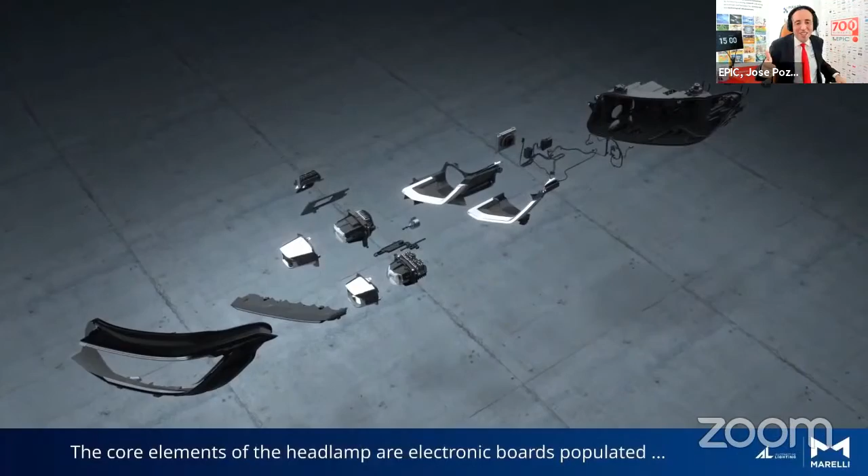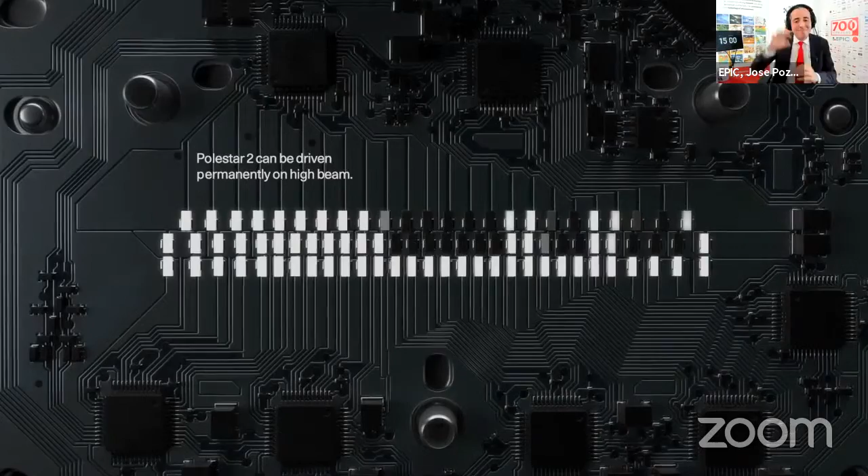However, during our previous meeting on automotive lighting, Volvo shared their unmet needs in terms of power, field of view, and their vision on having both a low and high beam, maximizing the illumination of the road. And this adds to the upcoming demand for better interior lighting in automotive. So we are bringing back Volvo and its supply chain to discuss how molded optics need to adapt to their new challenges. We certainly can't have a successful meeting on molded optics without Leica in the room.

They've spent 107 years developing camera solutions that capture the memories of 5 generations. I want to engage with them about the need for high-resolution features in the optics, which implies high-resolution features in the mold itself. What new materials are needed and what new manufacturing techniques for the molds, such as direct laser writing, nanometer scale 3D printing, or the development of flexible molds. Let's wait for their answer to our famous EPIC question.

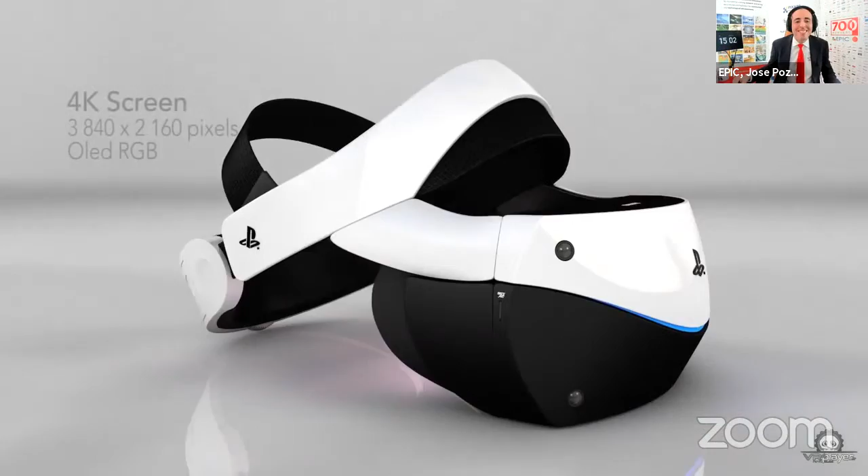The 2-hour discussion will also examine room for cooperation with the manufacturers of the PlayStation 5, Sony DADC. The entertainment world is in a constant flux. The need for novel optics in augmented reality, as well as high-quality streaming to the gamers themselves, has opened up new challenges for the optics manufacturers. These are just 3 examples.

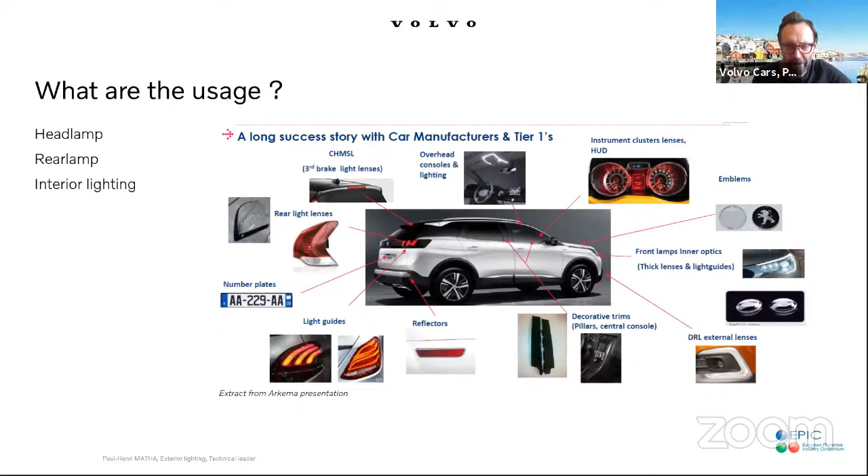So I hope you see my screen. Very clear. Yeah, so I have done some small slides, just to introduce the topic of automotive lighting and to show you the stakes. I think it is a slide I already presented in one EPIC meeting, but it is the usage of optical parts in exterior lighting. So we have headlamps in the front, rear lamps in the rear, and we have also interior lighting. So a lot of components with a lot of optical systems and different technologies.

So what are the stakes for us? It is for signaling functions. You see, for example, on this picture, the DRL function, the daytime running light, what we call in Volvo the Thor's hammer, which is the Volvo signature. And also we use it for lighting functions. For lighting functions, I have seen your video from Polestar. So it is, for example, the Polestar 2, where you see the headlamp.

And when you see what we have inside, indeed, we have the LEDs with the PCBs, but we have also an optical system with the silicone part component. We have also the lens, which is in plastic, and we have a lot of other components. All these things are part of the optical system.

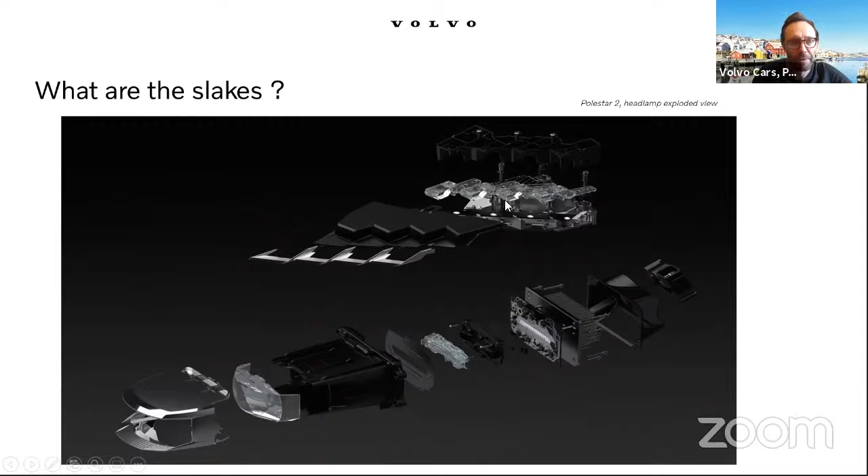When we develop some optical component, especially for signaling function, we have some technology like reflector, light guide, inner lens, Fresnel concept and so on. Each time we combine a different optical system between the LED, which is the input, and the output, with light guide combined with reflector and so on. All the signaling functions are done like this for automotive lighting signaling function.

What is the main stake for car makers today? With electrification, it is especially the power consumption. On this slide, on the left, you have what we have for daytime running light with bulbs: around 50 watts per car. If you design a very efficient optical system, with optical efficiency around 50%, you will have between 10 and 20 watts. So this is very efficient. We have no topic for this.

But when you want to design something very nice, like the Volvo signatures, the power consumption can be between 30 to 60 watts per car, and the optical efficiency will be very, very low. Sometimes we will have a power consumption which is more powerful than a bulb function.

We have exactly the same topic with low beam power consumption. By night, with bulbs in the past, it was around 140 watts per car. With an efficient LED system, quite big, what we see for example on this Renault Captur, the power efficiency is also quite good, and the power consumption is quite low, around 20 to 40 watts per car.

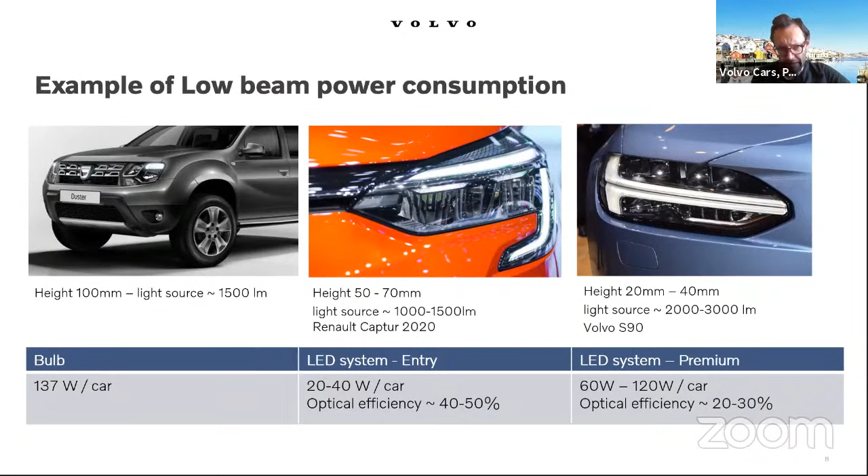But when you want to go to a very efficient system with a very thin headlamp, like what you can see on the Volvo S90, then the power efficiency is less good, and at the end it can be at the same level as a halogen bulb. This is today what is very, very important for car makers.

Just to give some figures: when we speak about power consumption, 50 watts is equivalent to 1 gram CO2 when we speak about internal combustion engine, what we had in the past with gasoline and diesel engines. This is the value during WLTP homologation in Europe. When we speak about electrical cars, battery electrical cars, BEV, it is around 1% of the range. It depends on the size of the battery, but 1% of the range is a good value for 50 watts.

To work on that, we have to look at the lumen output per watt, so the lumen per watt or candela output per watt. What we have seen previously is that for lighting function we are between 20 and 50%, and for signaling we have around 10%. So this is not good, or it could be improved.

What we need is, if we want to reduce the power consumption, to reduce the size of the battery or increase the range of the car, we have to develop more efficient solutions, less watt for the same amount of lumen. The idea is to be able to multiply by 2 the efficiency of the system.

On the right, I put what are the actions and what we are waiting for from EPIC members: to work on the light source, the optical system, the plastic raw material, the injection tool, the tool design, the optical concept itself, or all the other things we can develop. This was my last slide, just an introduction to show what we need if we want to improve optical efficiency for automotive lighting. Thank you.

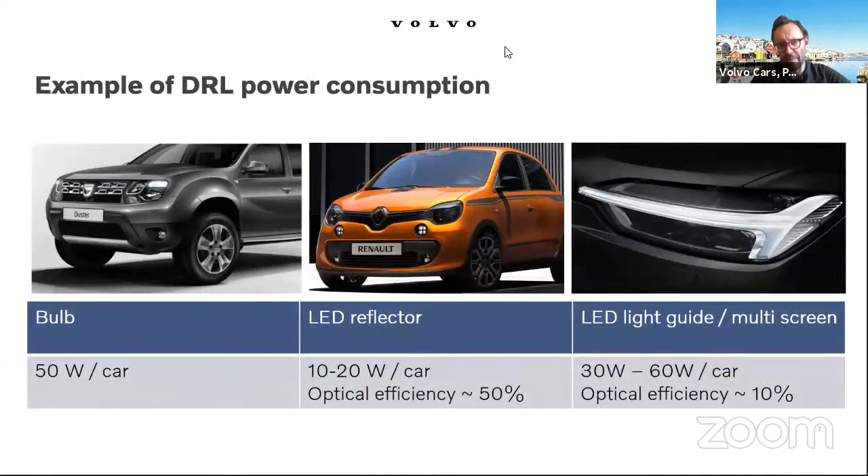When it comes to optical design, what do you mean by optical design? I've just mentioned some designs. For example, with a reflector solution, with inner lens, with light guide, it is not very efficient, so perhaps we have to create new designs. We have seen some MLA, micro lens array concepts, we have diffractive optics, we have new designs, but for the moment it is only research. We have not seen it in pre-development or in development. So I think it's something that could be very good, but we have to move forward and be able to do the industrialization and development of this technology.

Thank you so much. Let me see if we have any comments from the room.

Please unmute. There are many comments in the room which I'm going to voice out because people are telling me in private. The first comment is that everybody sees a huge push for plastic. Is there anything going on with glass-based optics? I know it's used heavily for interior, but for exterior lighting, is there any activity on that?

Is there any challenge that we cover with glass? Yes, glass is good, but after that we have the problem with weight. So yes, glass is good, no issue for that. We worked, for example, in the past with Holophane in France, a good supplier. We have Docter Optics, so we have a lot of suppliers with glass. It's not a problem, if we have some good properties with glass, we can use it. I understood that we have limitations with the shape, so especially for the designers, glass is always a question and it could always be a problem.

You know what the problem is here? From all these meetings I realize that end users come here with a challenge, and the challenge is always: cost is a challenge, weight is a challenge, materials are a challenge. How do I make these optics come true? And then we have the suppliers who tell you my optics are the best, my material is the best, my molds are the best, my nano imprint lithography is the best.

Just for recapitulation, I want to show you how glass molding works. We have dedicated glass preforms, which we put into very precisely manufactured molds. We heat everything up together, and then we have pistons that move toward each other, causing deformation of the glass preforms and leading them into their final shape.

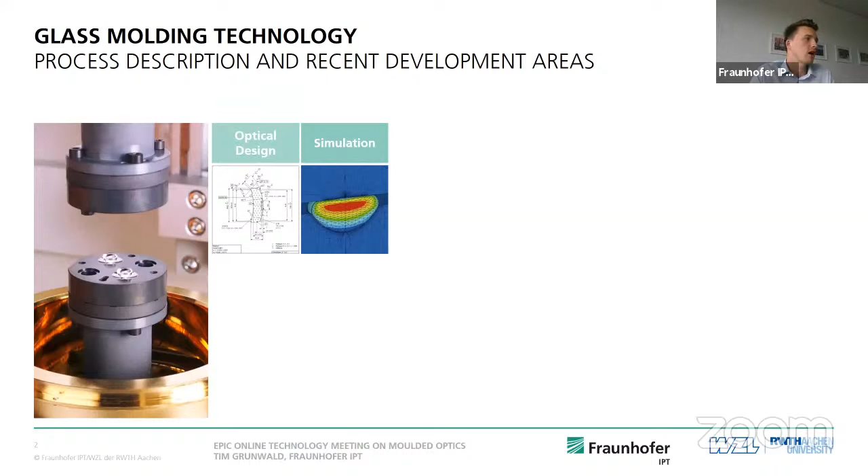What we usually do every day in our department is start from an optical design. Based on that, we make a first simulation to see how it will look, what the cost will be, and if it's feasible. The main point the simulation tells us is how the tools should look. The tools are later manufactured in-house by means of ultra-precision grinding, for example. Subsequently they are coated, and afterward the molding takes place.

One aspect covering the whole process chain is actually metrology. In the end, we have a ready-to-coat optic or a ready-to-use optic. So this is what we do every day.

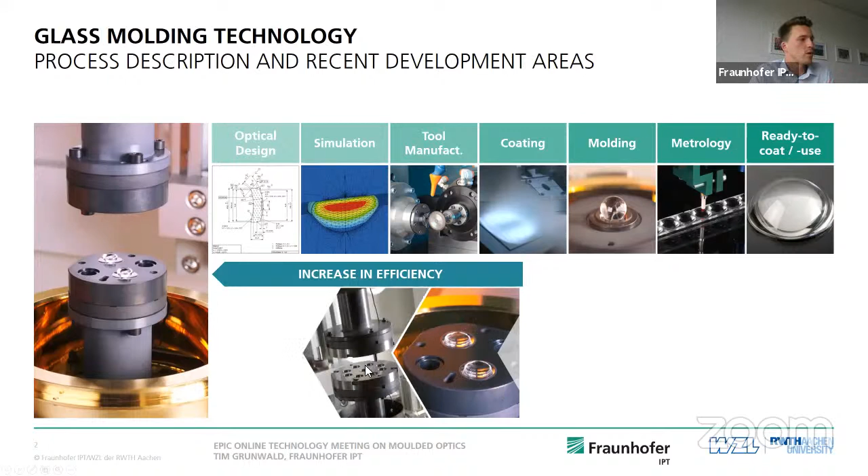But of course we also face challenges, mostly coming from industry. The first is that we want to increase efficiency. Glass will always be more expensive than polymer, but we try to make glass cheaper and cheaper. That means we can do more glass optics in one shot, or even multi-cavity molding — here you can see, I think, nine cavities.

We can also step to wafer-level glass molding, where we just put a glass wafer into the molds and manufacture hundreds of lenses in one shot.

But this is not what I'm going to talk about today. I want to talk about another challenge, called the increase in precision. For some impressions, here you can see some spheres, some freeforms, and some micro-optics.

We are already within fractions of a micrometer if you take a closer look at the peak-to-valley error, and the roughnesses are in the single-digit nanometer range. But we think glass molding has the potential to do even more in terms of precision, more than, for example, grinding and polishing.

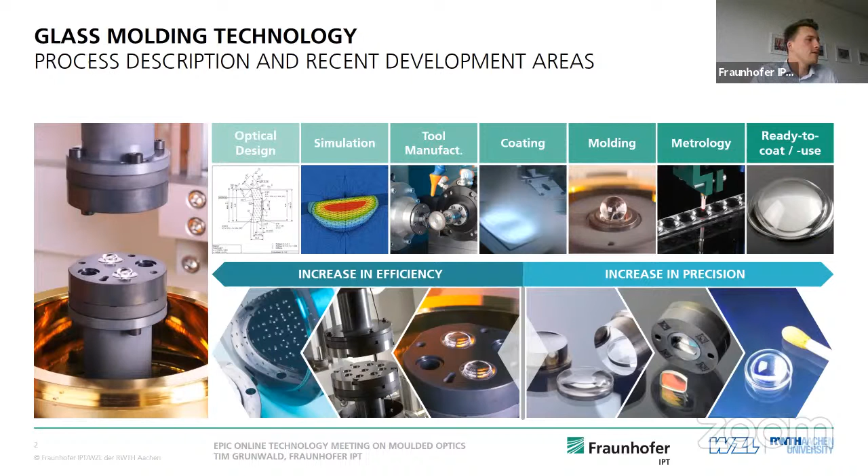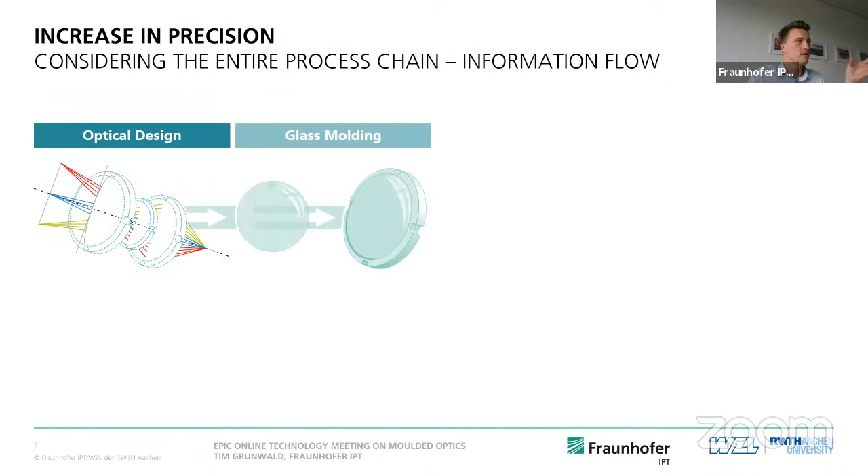Before I come to that, I'll tell you what the problem actually is. If we take a bigger picture of optics production, we always have to consider optical design, then fabrication — glass molding, for example — the coating, and the assembly.

So how does it normally work? We start from an idea, come to a specification sheet where everything is written down, and go to optical design. The optical design tells exactly how many micrometers or nanometers of tolerance we have in glass molding and assembly, for example.

That goes into the manufacturing part. We start with the measurement report, do the assembly, have inspection and so on, and then we have our usage phase and can trace everything backwards.

But as you might see, the information volume is always decreasing, condensed into a very small set of parameters that actually have nothing to do with the actual function of the lens.

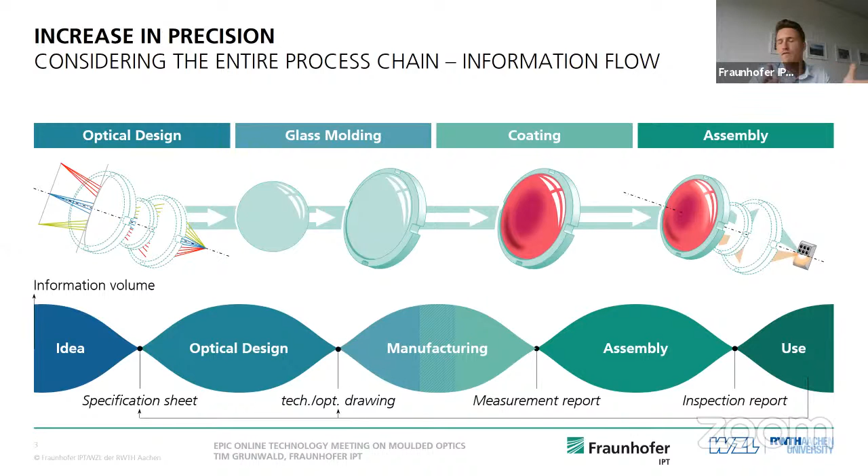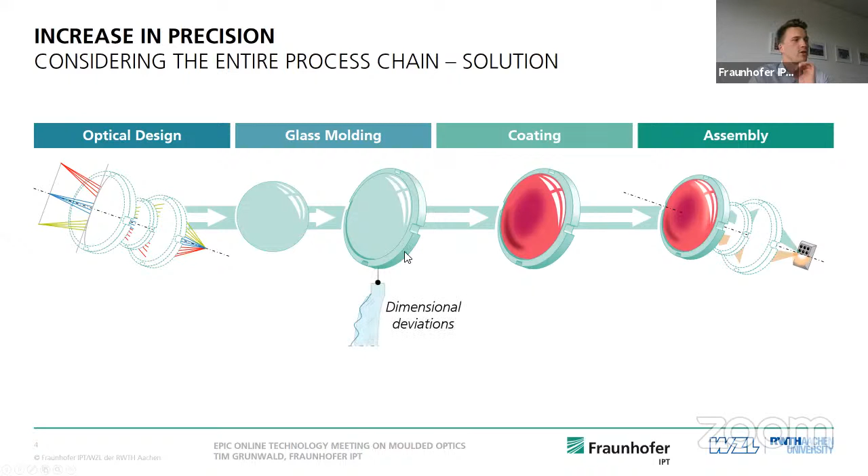Today I'll explain in two minutes what we think could be the solution, and later this will be up for discussion — whether you think it's feasible or worth developing. Glass molding is actually good for this approach because we can assess many things, for example the dimensional deviations, but also structural deviations.

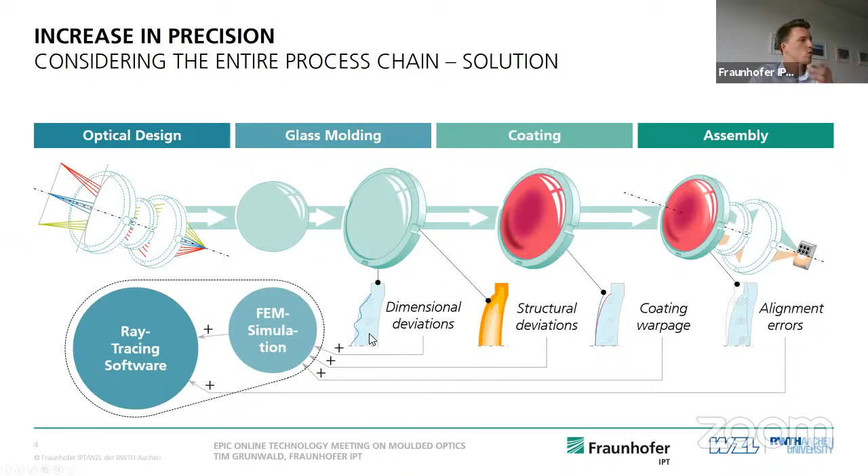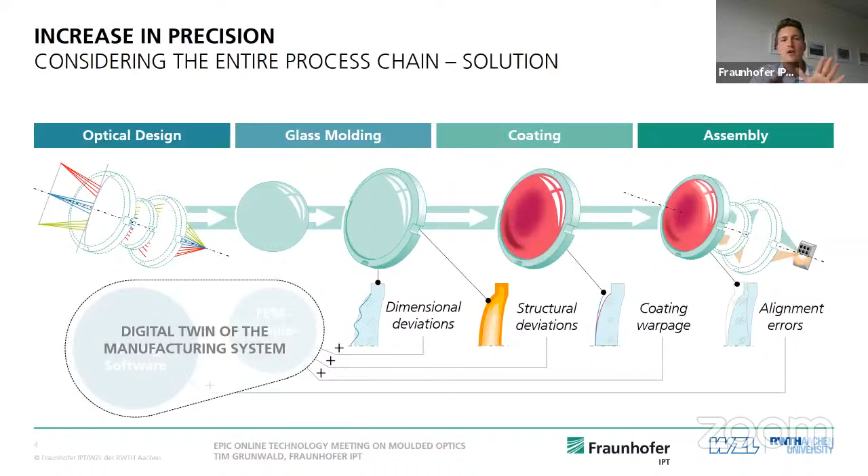And another thing, for example, the alignment errors from the assembly, they will also be trackable in the ray tracing software. So that means we have got everything in one digital environment, and this is what we would call the digital twin of the manufacturing system. So if we have got everything in a digital environment, we know already how the subsequent process steps will behave, and we can anticipate them. And the main benefit from that is that we don't need tolerances like nanometers or whatever anymore.

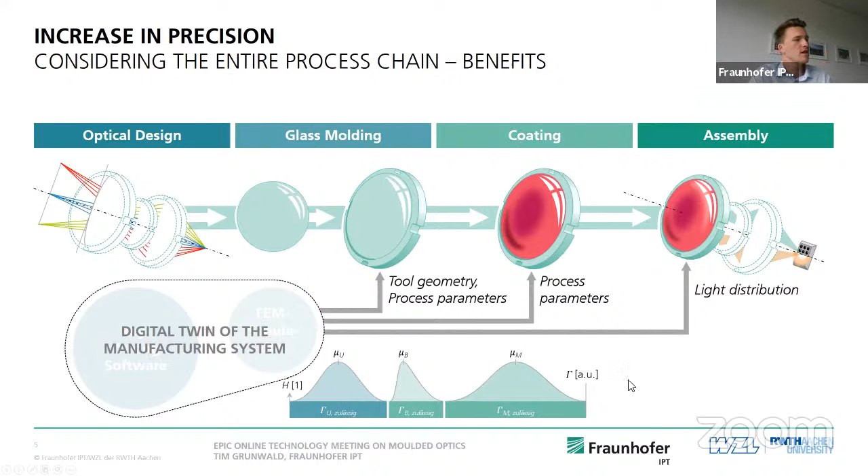So our goal is that this manufacturing system will directly give us the tool geometry, the process parameters for molding and coating, and not an angular tolerance for the assembly, but a light distribution directly. We do not want to have an overall tolerance where all the different processes have to fit into this general tolerance. We want to flip those tolerances and capabilities of the processes to the side, and lay all those processes on one line so that even if one process is not as accurate as the other, we can still have a perfectly working system in the end.

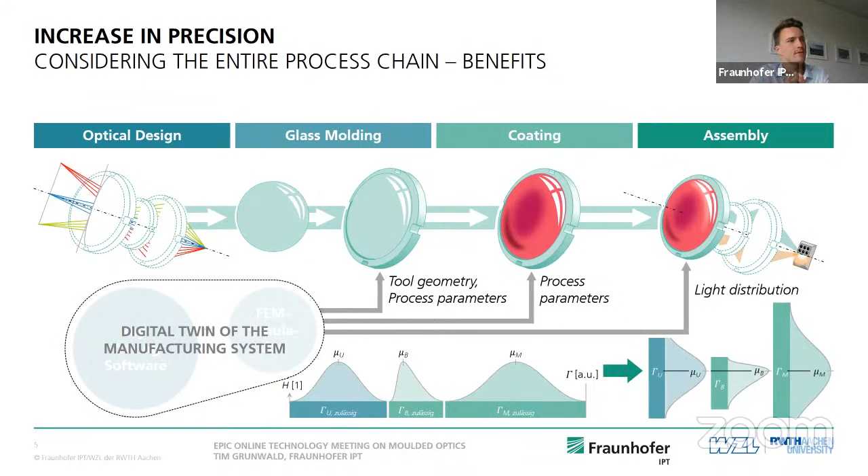On the other hand, we are a research institute. We do not have a running production. So it would be very interesting for us to have some real-life test beds in companies, for example. And we are always looking for industrial partners for publicly funded projects. And of course, we like to know what are the next level challenges that you are facing and what you would like to have developed.

I just presented something about digitalization, and I would like to know from you now, is that already a topic that you want to address in the next few months or years, or whatever your short-term horizon will be? So thank you very much. And now I'm open to questions, of course.

Thank you so much, Tim, for this very nice talk. The digitalization technology you showed us right now, did you specify a material there, or what are the materials you think it's applicable for, or just glass?

Yeah, so we are right now focusing on glass, but there are no limitations to what type of glass. Maybe fused silica is still a bit limited because it has a very high forming temperature. But going from chalcogenide glasses to soda lime to low Tg, this is all possible. And of course, we have a department at Fraunhofer IPT that is also dealing with injection molding, and it is also possible in the future to expand this model to this similar process. Yeah, thank you so much.

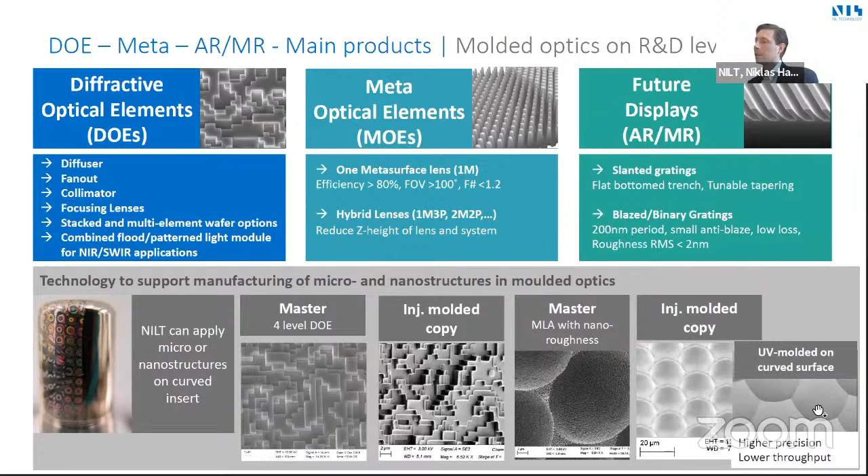Thank you very much, Niklas. Wonderful. George, this one, NILT, is one of the ones to watch. George, we're going to have a drink in 5 years and you will see that I was right. This is one of the ones to watch in Europe right now.

But I want to address another topic. You talked very quickly about the glass touching the mobile phone market. And on that, we have Henrik Madsen from Spire. Henrik, thank you very much for joining the meeting today.

What's on your mind? I just want to mention that there has been some news on wafer level optics or wafer level production of mobile phone lenses. I know that AAC and Kaleido just announced that they are now producing wafer level optics for mobile phones. But that's from my previous employment at Kaleido. We are Spire System. We are doing wafer level micro optics, not in glass but on polymers.

I could show you a small... Go ahead. We all want to know because we want to work with you. George is as excited as I am. Okay. Yes, absolutely. Let me say before you start, just a minute, let me say a quick word to Niklas.

Yeah, Niklas. I mean, it would be wonderful to have like a DOE or a meta surface for color correction. And so if you have state-of-the-art technology, just please talk with us. I will reach out to you through Jose. So Spire, let's talk about that.

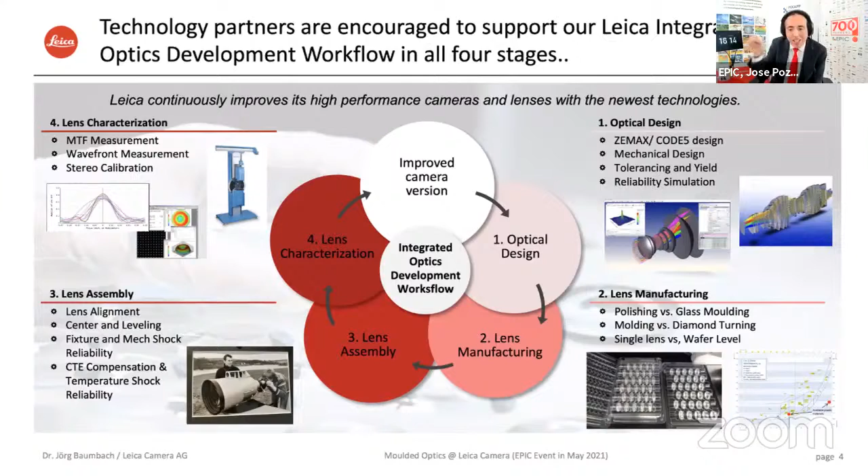We talked very quickly in your slide, in the beautiful slide that Sana and I like so much, about the activities on lens assembly. And here, when we talk about wafer level optics, people are very happy with passive alignment. When we talk about micro lenses, individual alignment, we are very happy with active alignment. Could you share with us one challenge, one room for cooperation, one thing that we could do maybe here together?

Well, I think the big challenge in the assembly will come when it goes to hybrid, when we combine plastic and glass lenses together. And that could well come because the industry requires more compact lenses. And when it goes to more compact, then we usually talk about higher aspheric ratios. And with higher aspheric ratios, maybe some lenses you will not manufacture in glass anymore. Maybe at a point you will manufacture in plastics, assuming that the plastic is durable and reliable and doesn't change in color and all these things.

And there is one more company, George, that I want you to meet. There is a company called Glassomer. And Glassomer is here for the first time at an EPIC meeting. Frederik, welcome to the family. Glassomer was very interested in looking for partners and identified Leica as a potential partner. Tell us here what you want to do. You have end users from Volvo all the way to glass manufacturers like Schott. Many companies who can help you. Tell us what you do, and most important, how we can help you do it even better.

Thanks very much for having me here. Really happy. We discussed so much already about glasses, which have these amazing material properties for optics, transparency, stability. And we have plastics on the other side, which are super easy to mold, where we can get high resolutions, where we have scalable processes like injection molding. And that's basically where we come in. We are a startup from Germany, and we are glass component manufacturers who found a way to make glass structuring as simple and as efficient as polymer shaping.

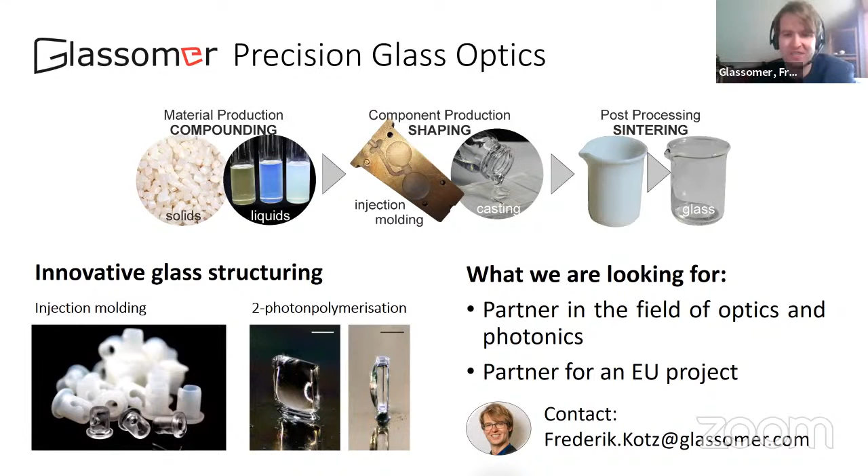No, we don't have any micro cracks. Our standard material is fused silica glass, which has that low thermal expansion, 0.5 times 10 to the minus 6. You can basically heat it up as fast as you want and cool it down as fast as your oven can go. We even did microwave sintering of that, and you never face any issues of internal stresses. If you make multi-component glasses, it's the same as for all glasses. You basically have to temper at some point.

No, I was wondering during the sintering process, because during sintering you normally have some areas which are already glass and some are still the old polymer. And there I thought internal stress could result.

Yeah, so basically the main trick behind our technology is we found a way to get rid of this binder before the sintering process. You have a debinding step where you remove the binder, and we can do that by a two-step process where you remove one component first, you create a porosity, but only in the binder, through which you can afterwards burn off the organic. This is mandatory because, as you said, if you used a pure polymeric binder and heated it up, you turn a solid into a gas, and that's normally called an explosion.

Thank you very much. This is your first appearance. I'm going to go back to George. George, it was your first ever EPIC meeting. There's many people who ask me to be in contact with you.

There is a question on YouTube. Somebody is asking, can you consider laser machining for prototyping of freeform optics? Don't answer that question yet. I want you to see the next presentation by Microrelleus before you answer it.

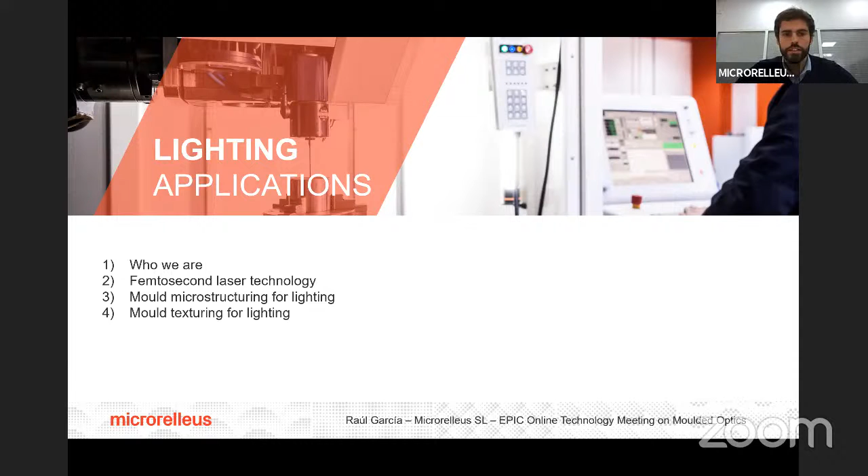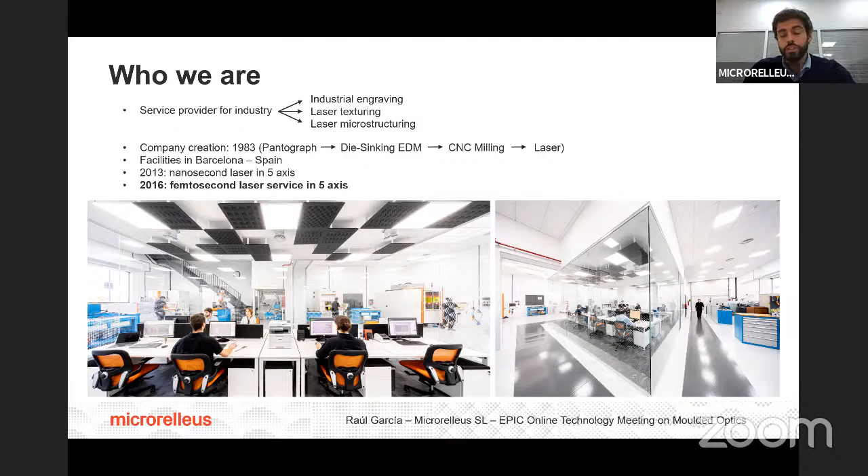So that's our company. We are based in Barcelona. We are a workshop, a service provider for industry. What we do is industrial engraving, laser texturing, and laser microstructuring. We have been in the market since 1983. And this presentation is based on the femtosecond laser.

In terms of microstructuring, we can create microstructures and free-form micro-optics in tempered steel inserts, both on flat surfaces or 3D shapes. Benefits: obtaining smaller details in a conventional mold, so new design and functional possibilities. Regarding texturing, we can texture inserts to achieve different properties like light diffusion, for example.

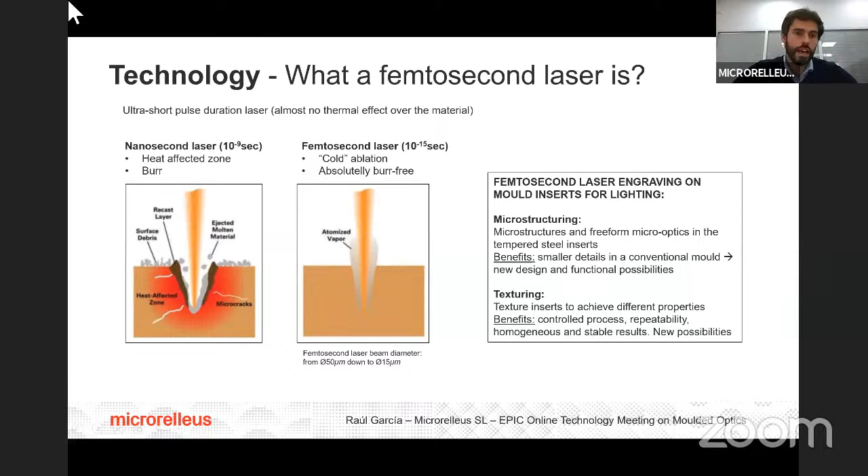Because of this cold ablation of the laser that we spoke about before, we can engrave microstructures absolutely burr-free with very good tolerances, high quality surface finishing, and very sharp edges. If we compare with the minimum size we can achieve using conventional technologies like a milling machine, we can achieve radii less than 10 times smaller. And because we are working from a CAD file, there are limitless design possibilities.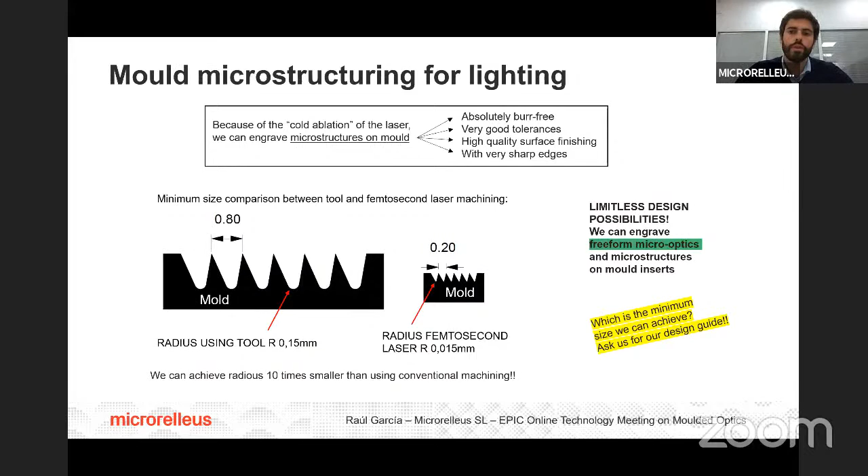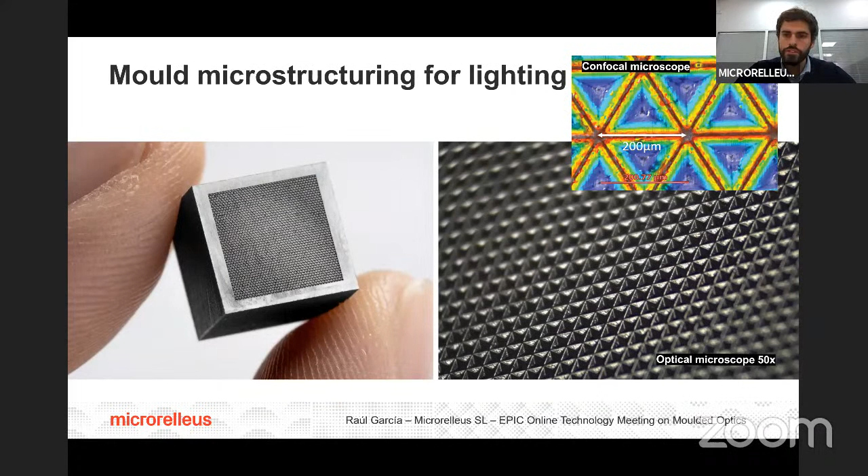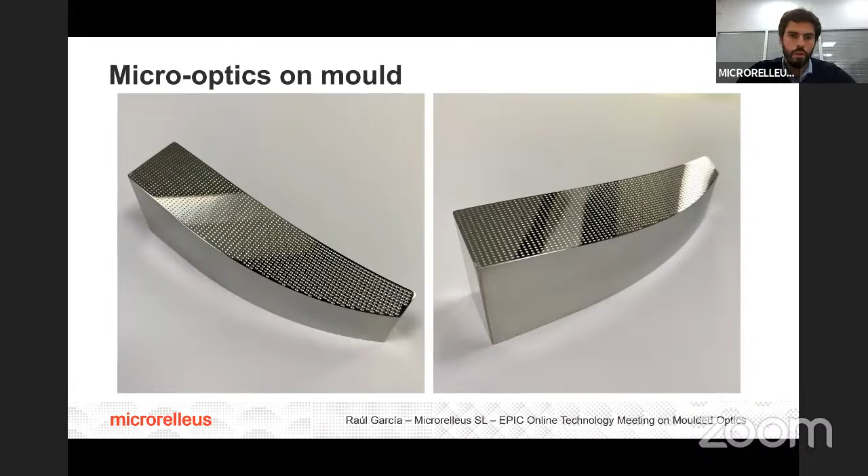We can engrave free-form micro-optics and microstructures on mold inserts. Here we can see an example of microspheres in high relief. That's the finishing we can leave. And even smaller: here we can see some pyramids with a pitch of 200 microns. And not just on flat, but also on big 3D shaped inserts. Here we can see a lot of micro ovals from bigger to smaller sizes.

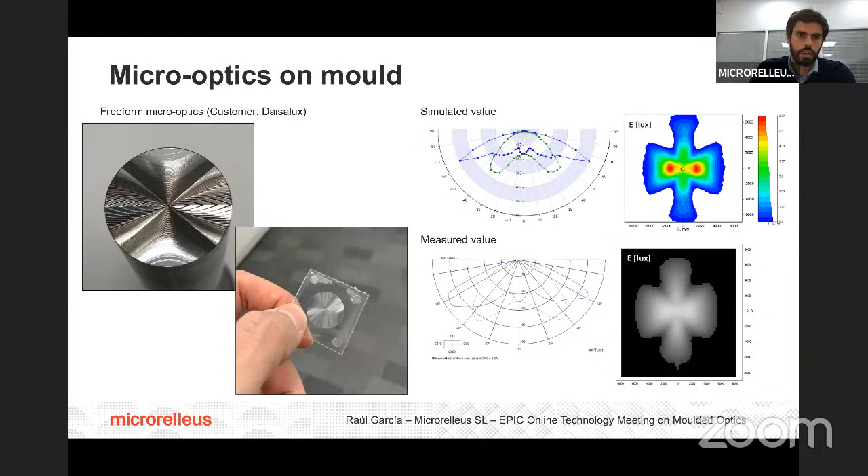This is a project we did for our customer Daisalux, a very nice and innovative company in the Basque Country. In this case, they designed this free-form micro-optics for their specific purpose, and we engraved the mold insert using the femtosecond laser. You can see here an image of the insert and the final injected product, and the comparison of the simulated value versus the measured value in photometry on the plastic injected part, as an example of the possibilities.

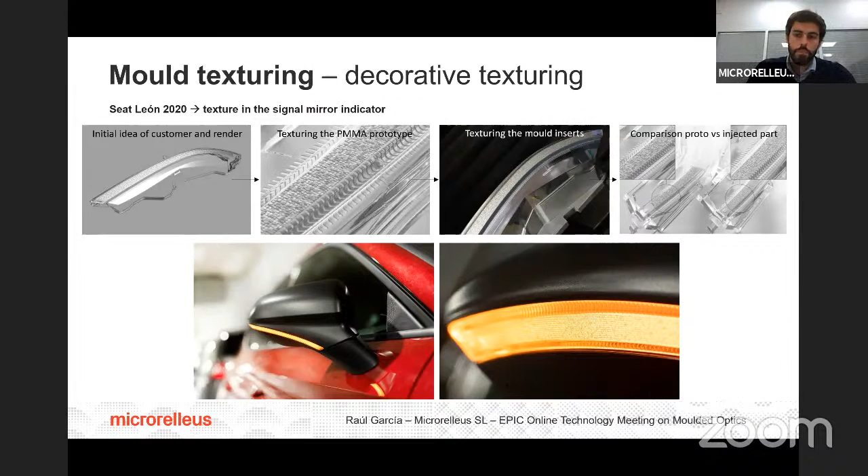In the Seat Leon 2020, for the signal mirror indicator, the customer wanted to achieve some specific texturing in the blinker. So we engraved the PMMA prototype. Because of the cold ablation of the laser, we can engrave any material, so we work a lot on prototyping as well, directly on PMMA or PC. Then we textured the final inserts, and here we can see the product which is on the market in the Seat Leon.

Regarding functional texturing and light diffusion, three years ago we did a project trying to avoid the hotspot of the LED, texturing the mold and injecting transparent PMMA. We had some problems in terms of repeatability and so on, because we used a nanosecond laser.

Two years later, we began to study the possibility to create some roughness in the mold using the femtosecond laser to achieve this homogeneity, to achieve this light homogeneity. So the important points we took into consideration for the design of textures were diffusion, quality, and luminance, but also repeatability and stability of the texture. That's why we used the femtosecond laser.

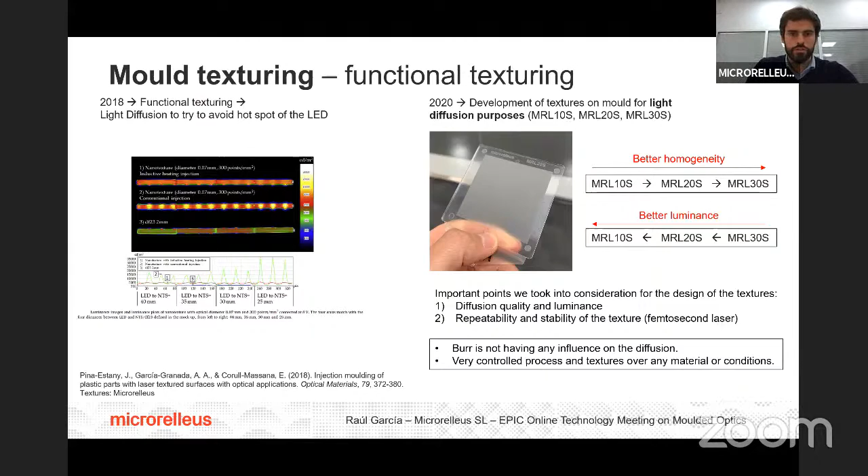Burr has no influence on the diffusion, so it's a very controlled process for texturing over any material and conditions. Here we can see diffusion in one direction, two directions, or the homogeneous one.

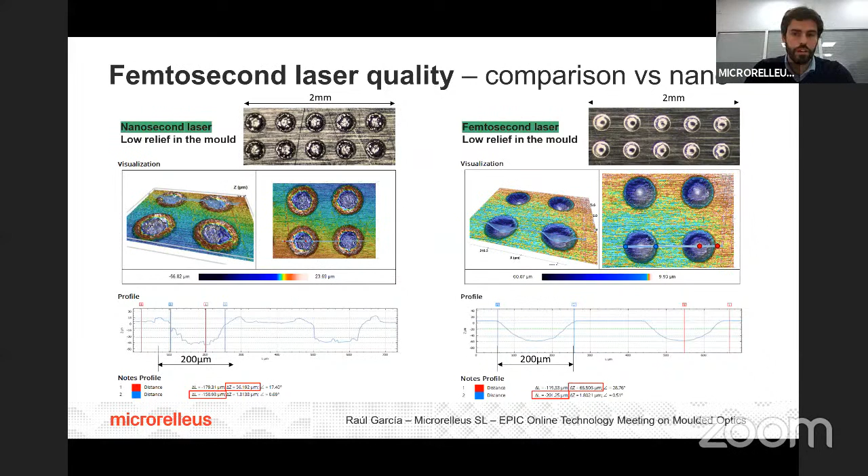Here we can see a comparison between the nanosecond laser and the femtosecond laser. Even though we can see two microstructures that seem to be the same, when we analyze with a confocal microscope, we see big deformation on the shape and profile when using nanosecond, and very good definition when using femtosecond. The same here, where we can see the difference in very sharp edges and very good definition of the sphere in the femto.

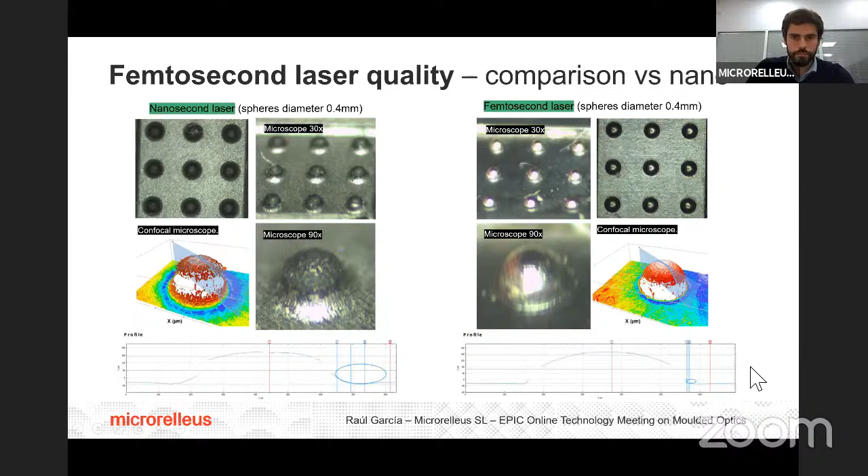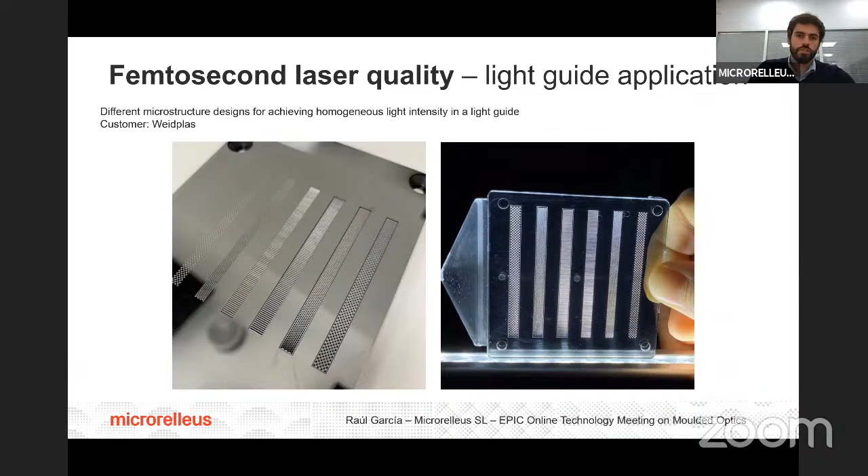To finalize with examples, this is a test for our customer Weidplas, and they wanted to obtain, for a light guide application using microstructuring, this light homogeneity all across, all along the area. So here we can see three textures engraved high relief and three engraved low relief for this purpose, with very good homogeneity, as we can see in the images.

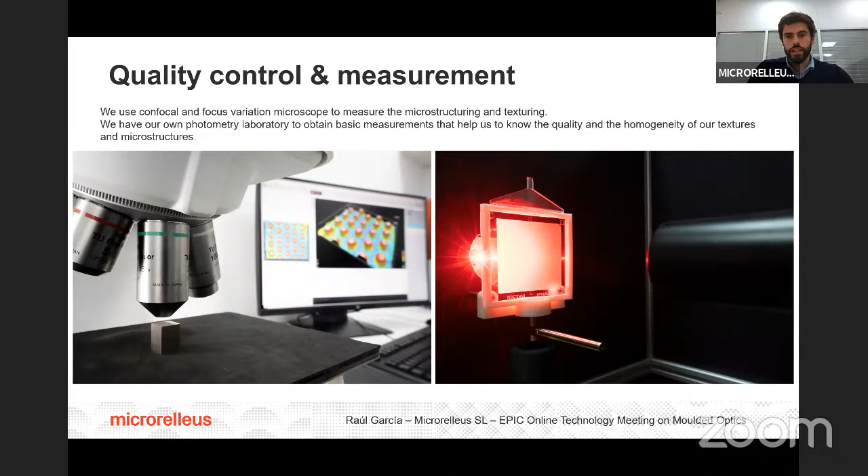To finalize, we have a confocal microscope and a small photometry laboratory to obtain basic measurements, because we are just an engraving workshop, but we need this to be able to deliver the quality that the customer requires and to gain more knowledge about these lighting possibilities. So that's everything. Thank you so much for your attention, and please feel free to ask.

Raul, I'm extremely impressed on how many success stories you have of building high-end optics to customers all the way for the automotive. So I want to go back to Leica as promised. I want to go back to Jörg and ask the question that was for you in the chat, but after this presentation. Have you considered ultra-fast laser processes for the manufacturing of freeform optics, Jörg?

I have you muted, which is unfortunate. Bottom left corner of the... yes, there you go. So no, that's good. Yeah.

No, we haven't actually, but it's really good to consider this. We need to think, we need to see whether in terms of accuracy, in terms of hazing or so, this is appropriate for the optical quality that we need. But let's give it a try. Why not? Absolutely.

That's the perfect answer, right, Raul? Now let me go back to you, Raul. I want to understand a bit. We all heard already in the beginning from Volvo about their challenges. We heard also from Fraunhofer IPT.

What kind of room for cooperation? Let me see if Paul-Henri Matha is still with us. Paul-Henri is here with us as well. Let me see what kind of room for cooperation we could have with these companies.

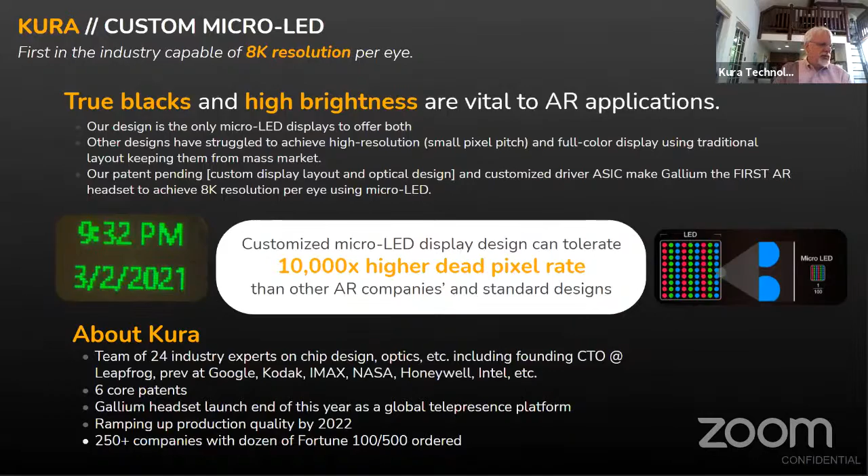So thank you for the chance to talk. Like I said, I've really learned a lot just today in my role in sourcing, and you've already done a lot for me in this forum, Jose. So I want to really thank you for it. Okay, thank you so much, Jack. Thank you for this fantastic presentation.

But let me tell you a thing about EPIC. Once you present what you can do, you have to also tell us what can the others do for you, or what kind of collaborations you're looking for, particularly that you're responsible for the supply chain.

You should know, I think that we've had a lot from this forum already. I've made a number of connections with the sponsors and some of the people already in this room. We're really looking at multiple generations of technology. This particular version is our launch, and we're looking at the next 2 or 3 versions of this product and platform. We're looking at how we can make this more efficient, more cost-effective, and move to better and more advanced technologies. All of these display engines have multiple elements, and there are many opportunities for us to collaborate with all of the technologies represented here. So thanks again, I'm open for any kind of suggestions, or I'd be glad to hear from anybody who feels like there's opportunity to reduce our cost and improve the performance of our product.

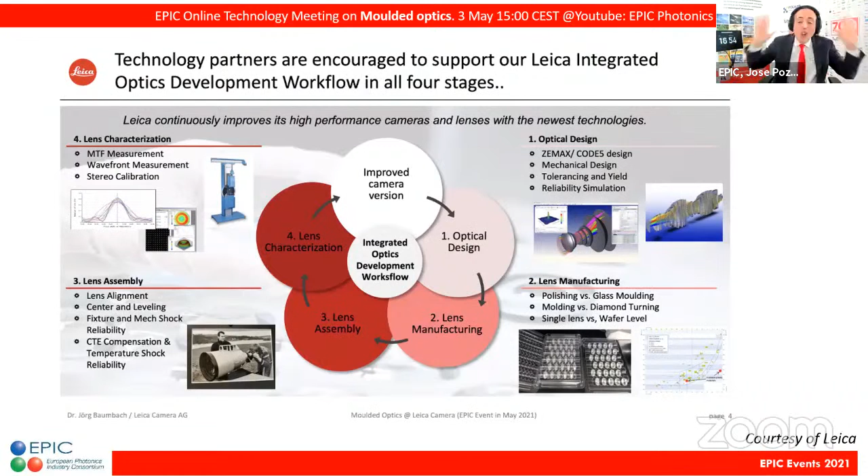It was great to have you in the room, and also all the others. You were all fantastic. You know what I want to say? I will say the same thing. The meeting looks like it's finished now, because it is 5 o'clock, but it's not. The most important part of the meeting starts right now. It's when you follow up.